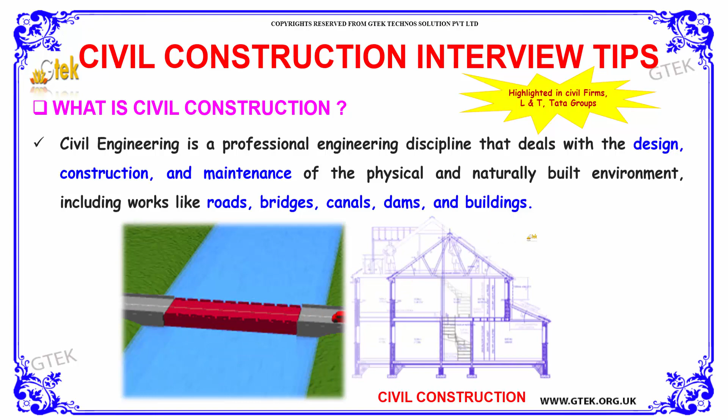Let us see our next question. What are the causes of building collapse? For a building to collapse, the reasons are passage of time; as time goes on, the tendency for a building to collapse will increase. Buildings also collapse due to weak foundations. Some natural disasters like earthquakes, hurricanes and other natural disasters can also damage the structure of buildings and cause them to collapse. Some man-made reasons for buildings to collapse are bombings and demolition. So these are the causes for a building to collapse.

These pattern of questions are highlighted in civil firms like Jaiprakash Associates Limited.

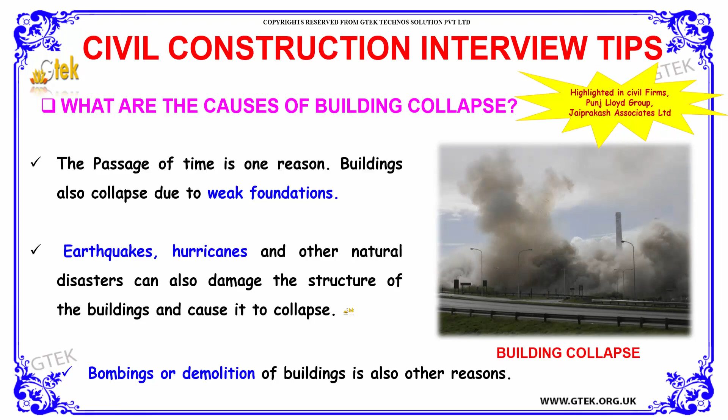Moving on to our next question. How are freeway bridges built? The foundation under the bridge structure is usually a combination of reinforced concrete piers and footings, along with built-up soil embankments. Reinforced concrete refers to concrete with steel reinforcing bars, known as rebars, within the concrete to provide structural strength for the bridge and reduce cracking in the concrete. Once the foundation and bridge piers are in place, one or more beam-like structures are placed on top of the foundation in order to create the bridge span.

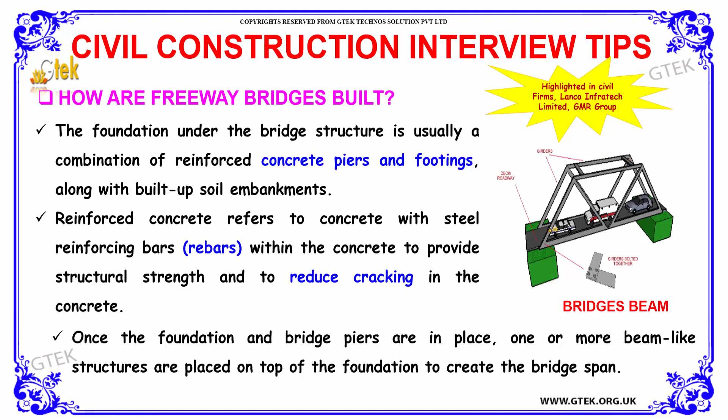Our next question is, how do you measure concrete? To measure concrete, you have the following terms: cubic feet, cubic yards and cubic meter. These are the terms used to measure concrete. Cubic feet is an imperial and US customary unit of volume, used in the United States and United Kingdom; that is a standard term. Similarly, cubic yards and cubic meter are also measurement units for measuring concrete.

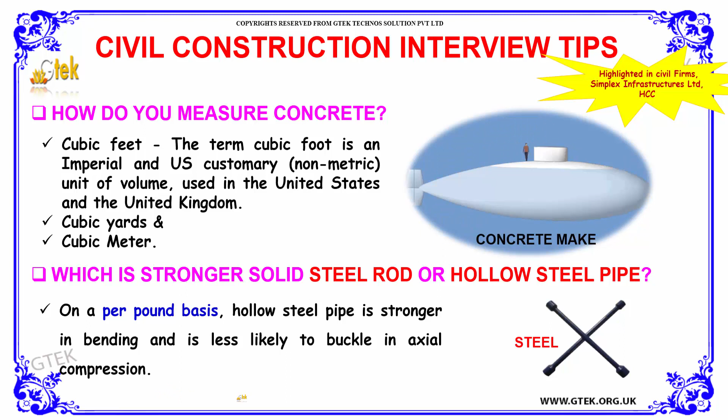Our next question is, which is stronger, solid steel rod or hollow steel pipe? The answer is, on a per pound basis, hollow steel pipe is stronger in bending and it is less likely to buckle in axial compression. So hollow steel pipe is stronger than your steel rod.

These pattern of questions are highlighted in civil firms such as Simplex Infrastructure and HCC, etc.

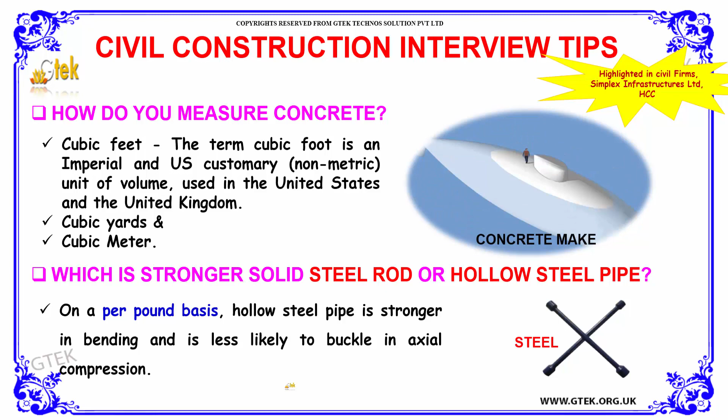Moving on to our next question. Which is the world's largest concrete dam? The answer is Grand Coulee Dam, and it is said to be the largest concrete dam. Currently, the world's largest concrete dam is Itaipu Dam, an accomplishment of two neighboring countries, Brazil and Paraguay in South America. So, the world's largest concrete dam is Itaipu Dam.

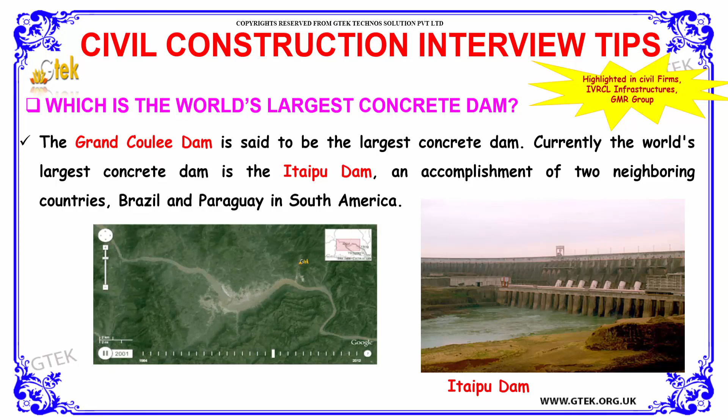Moving on to our next question. What is the meaning of soil reinforcement? Soil reinforcement is the act of improving soil strength to enable its support and carry more load. Two common examples are as follows: mixing a soil amendment such as lime into weak clay soil and recompacting to improve soil bearing capacity. Another example is installing plastic or composite webbing layers, called geogrid material, alternating with compacted soil to produce a stronger sloped soil structure. So that is all about soil reinforcement - it's the act of improving soil strength to enable its support and carry more load by adding components to it.